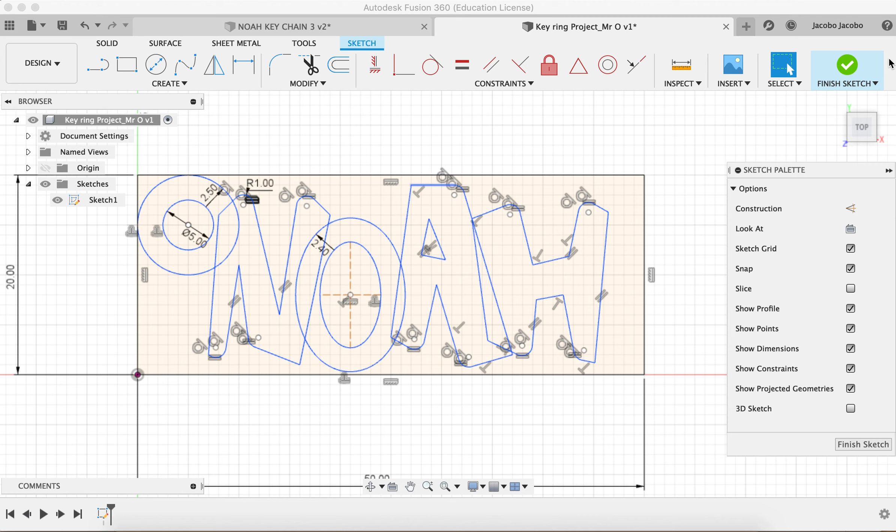Okay, welcome back. So the next part of this video, we're going to talk about extruding. Reminder that the goal of this is to understand the difference between design and the sketching space, and then how to use bodies and pay attention to the sketches inside of the browser, with the ultimate goal of 3D printing and laser cutting. So I've finished my sketch, and this is what it looks like.

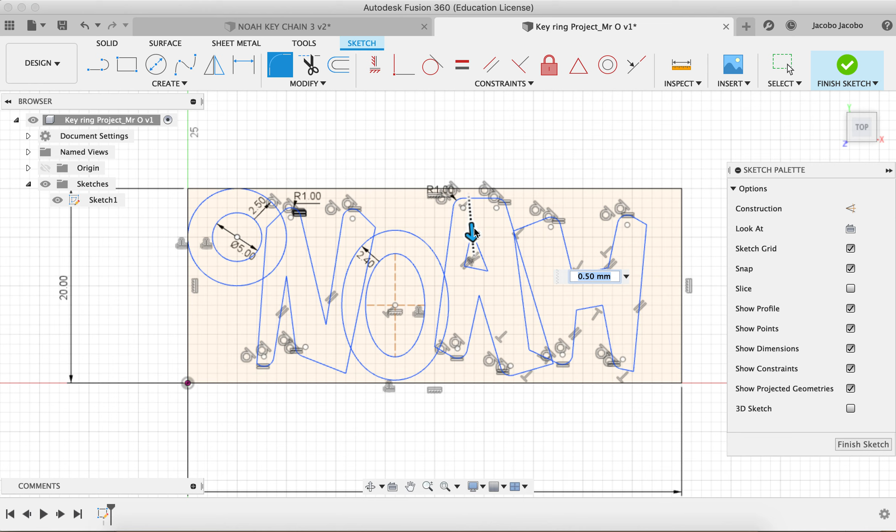I added a couple of things to remember. I can click here, hold down Control, go to Edit, and then something else in this Modify tool I was working on is you can also use this, it's called Fillet. Inside of this fillet, I can click one edge, click another edge, and see how it curves the edge for me. It's just another little tool you can use if you'd like in the sketching mode.

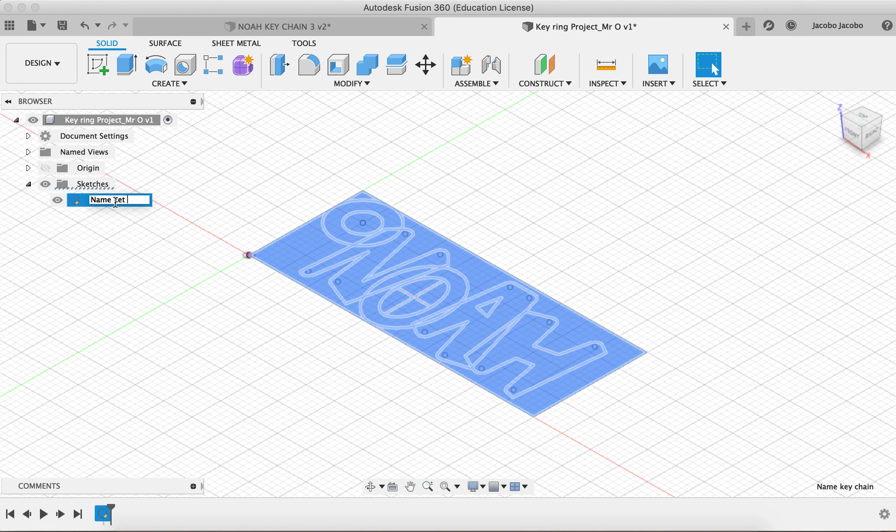So now we'll go back to that isometric view, and now I've got my sketch. You see how that's the sketch there. I'm going to change this and say name keychain. That's just again to keep things organized. If you click again, name keychain. Okay, good. So now I've got this sketch all finished, and now I'm ready to extrude it.

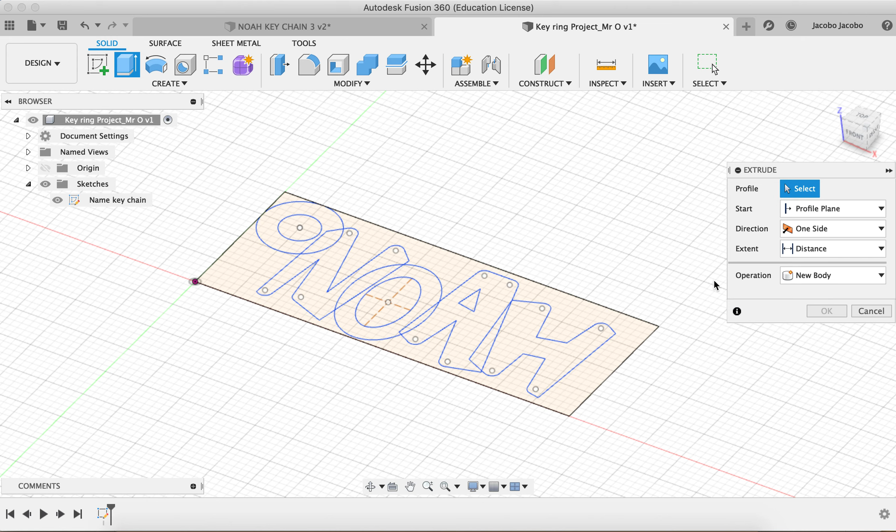So the way that I extrude this is I'm back in this design mode. Yep, I'm not in the sketch mode. So I'm going to use the Create tool, you can see it's Extrude. I can click the button here, or I can even just press E, and it also brings up the extrude window too.

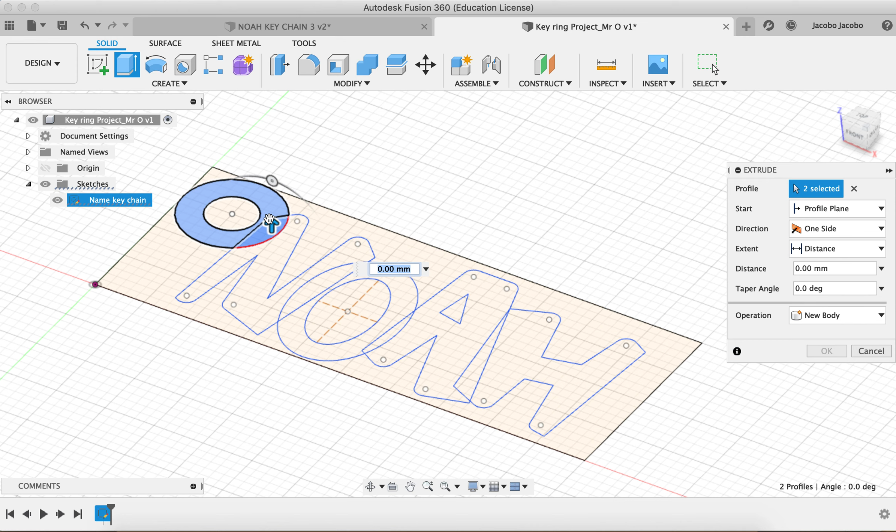So to start off with, I just want to extrude this key ring. So I can push it up, but to select, see how inside here, as I do it, it only gives me this option, but I really want to get both. So the way I can get both is I can click this, hold down, and then I can extrude it up. For this project, you can move it up as much as you'd like using your cursor, or again, you can type it in and say a specific amount, so you know how much it is.

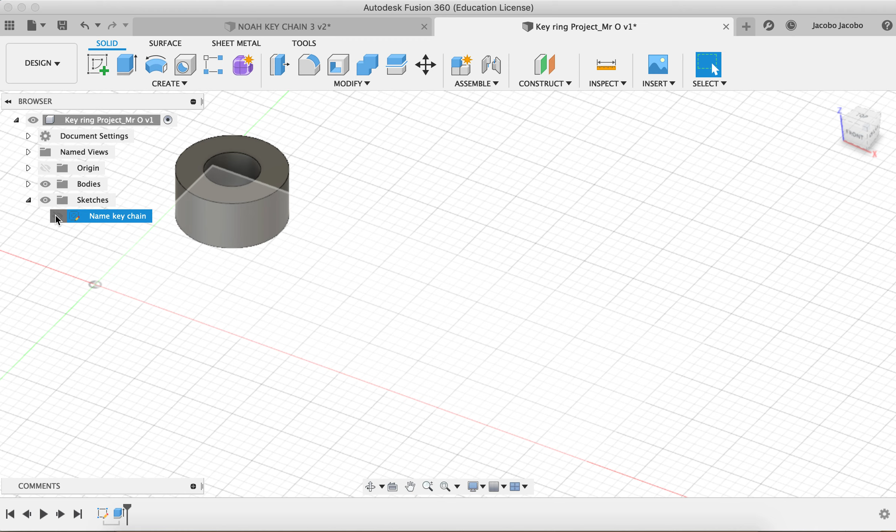Up, my sketch went away. So here's where understanding the browser is important. Over here, if I turn the bodies off, the bodies goes away. But here, the sketches were turned off and the sketch went away. So now I just click it again, this little eye next to it, and it will pop back on. So you can see it back, turn it off, turn it on.

Now, before we go too far, another thing you want to do, see how there was a new body created? I want to click in here and give this a name too, say keychain ring. Because that's where the ring is, and then all the other parts are the letters that I'm going to use. So now I can just move along and keep extruding.

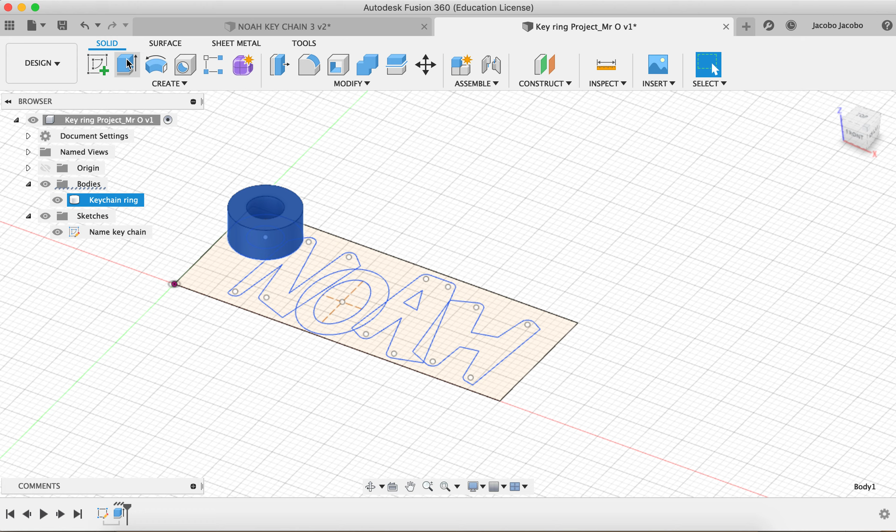Remember, hold down Shift if you want to add more than that one object. So you can either make it bigger or smaller, it's up to you, or however you want to extrude. Remember, I'm just clicking E, so that's going up like that. But this next step, one thing you want to do is pay attention to this window.

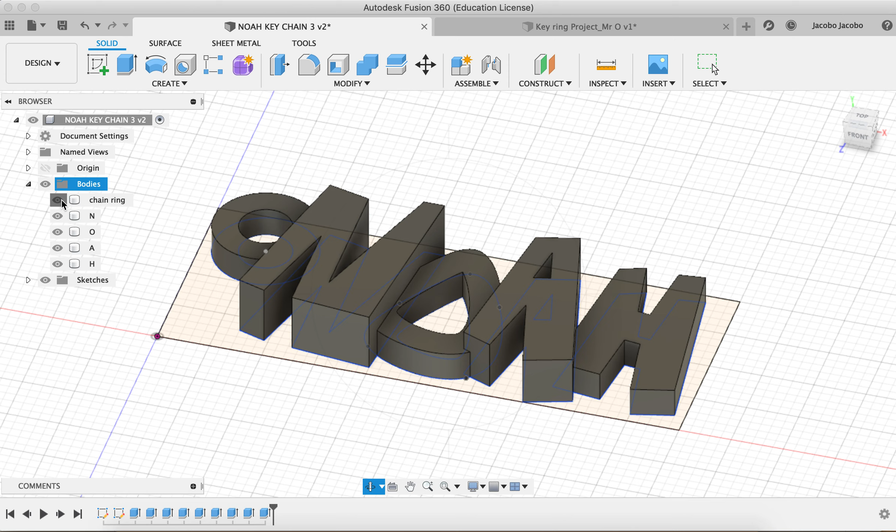This pops up: Join. What happens is if I click join, it's going to just make this one piece, okay? Versus over here, if you see in my bodies, what I've done is I've created a new one, so see how it's a different body. Again, this is really important to just keep your work organized. So I don't want to do the extrude and have it join.

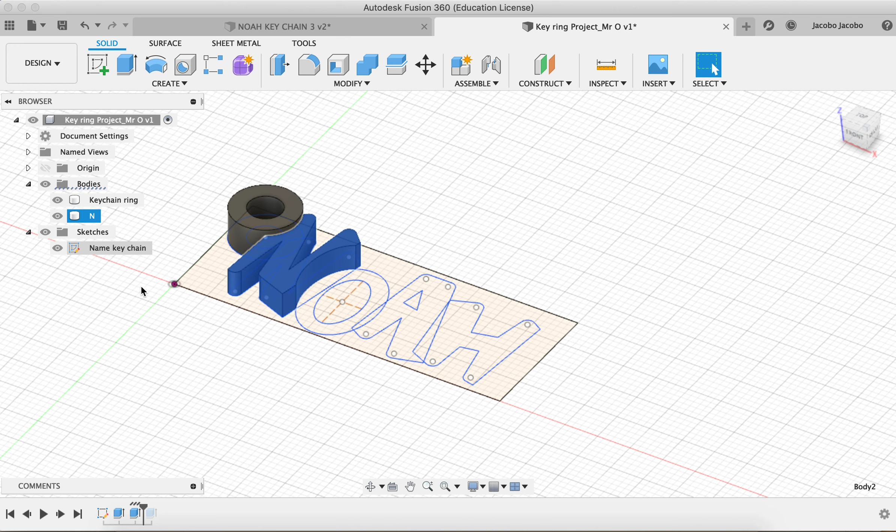What I want to do is extrude, and I want it to create a new body. Click this dropdown, click new body, and the new body pops up here. Over here, change it to N, and really pay attention to that as you're working through all of this different extruding. Extrude it back up, this one I want up, I missed a piece, so I'll click that and move it up a bit.

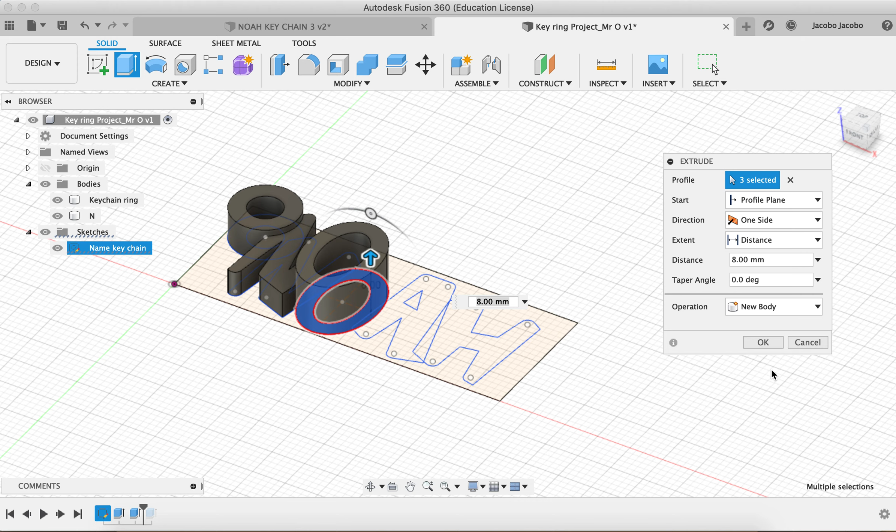I don't want it to join, remember, I want it to be a new body. Change it to O, enter. And then I'm going to do the A, clicking the extrude. Not join again, new body.

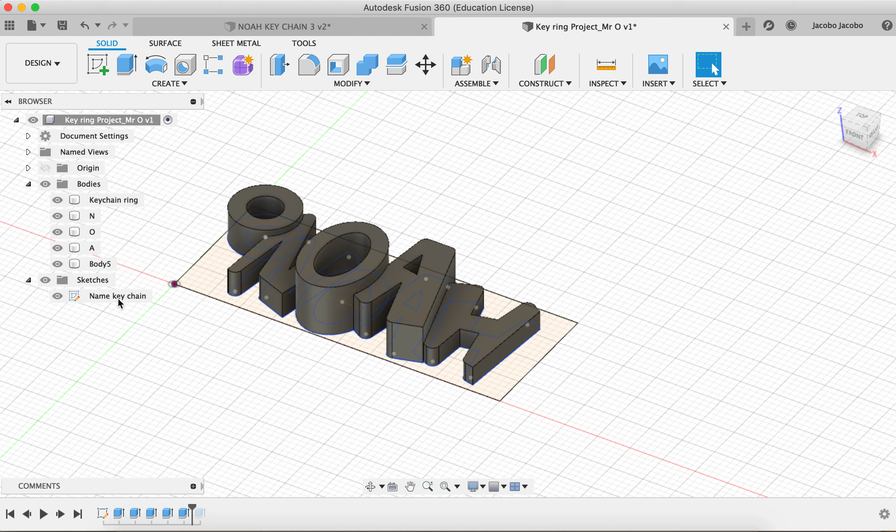A, extrude, push it up a bit. Last one, remember not to join, to create a new body. And there's my H, all right?

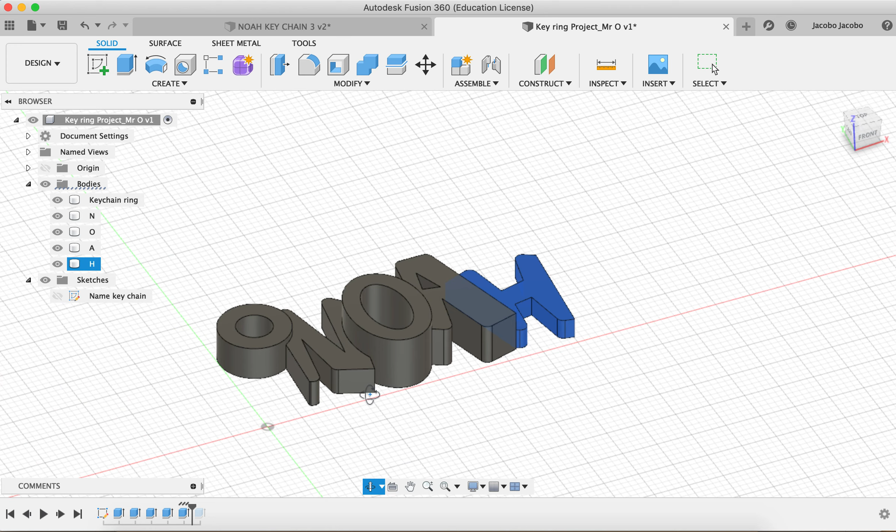So there you have it, that's just extruding your sketch, and now you can see that all I've got is this model, the design. Scroll and move around, you can see what it looks like, making sure that it's all been extruded correctly.

Another thing you could do, depending on your design, is extrude up this little outside if you want. So see how I can move that up just a little bit, maybe a millimeter or two, no joining, but creating a new body.

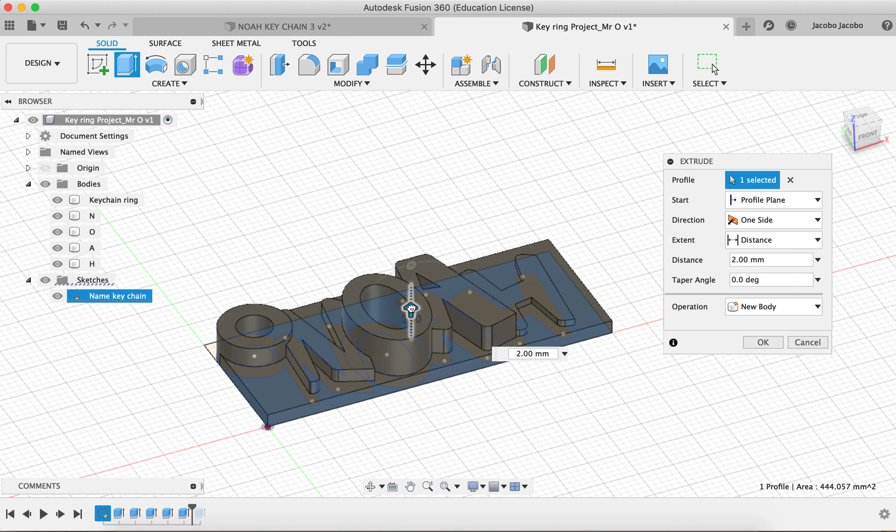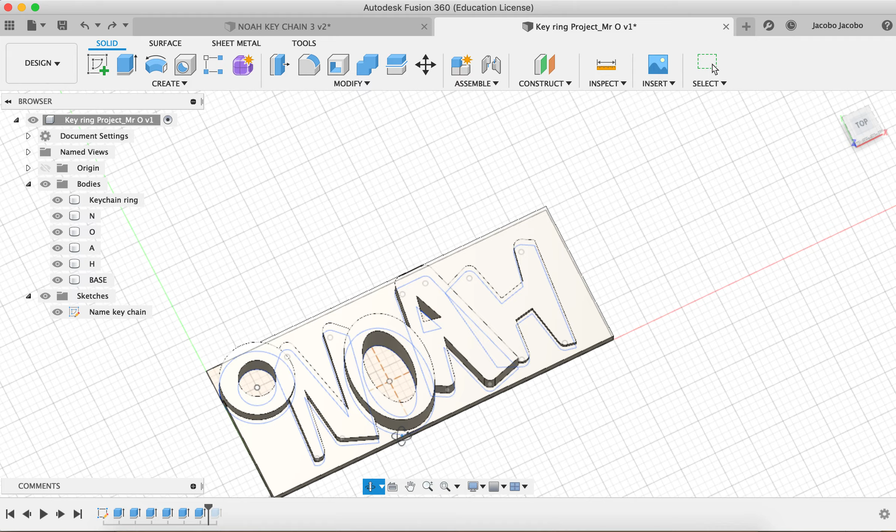Up a bit, I want to create a new body, remember. And this one, call it the base if you'd like. If not, you don't have to, but just so you see, here's another part of your design. Whoa, whoops. Okay, so see how that came out?

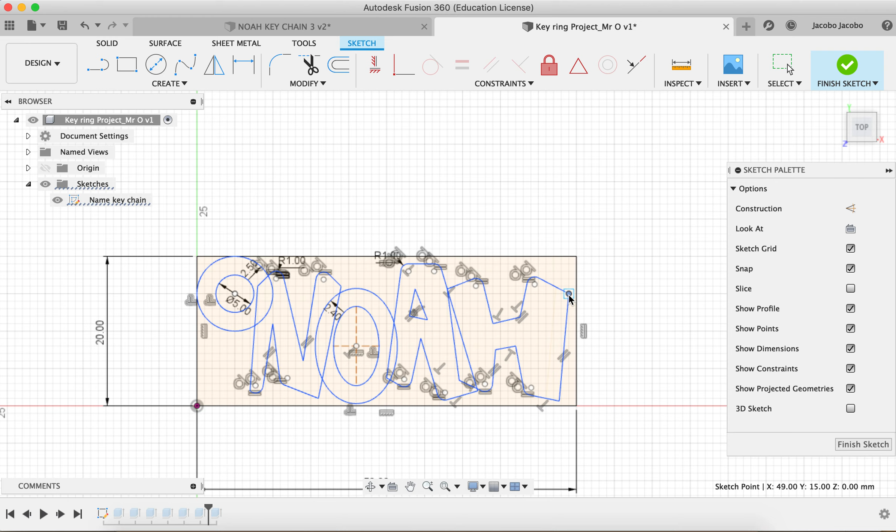So another thing, just to remind you, if I turn all these bodies off and go back into my sketch, say I want to move this or make this a little bit bigger, modify my line, or pull something out. Let's try to move this one down a bit just so you get to see how it could look, or maybe make this spot a little bit smaller. So as I modify this sketch, finish sketch, and turn my bodies back on, the bodies change with the sketch.

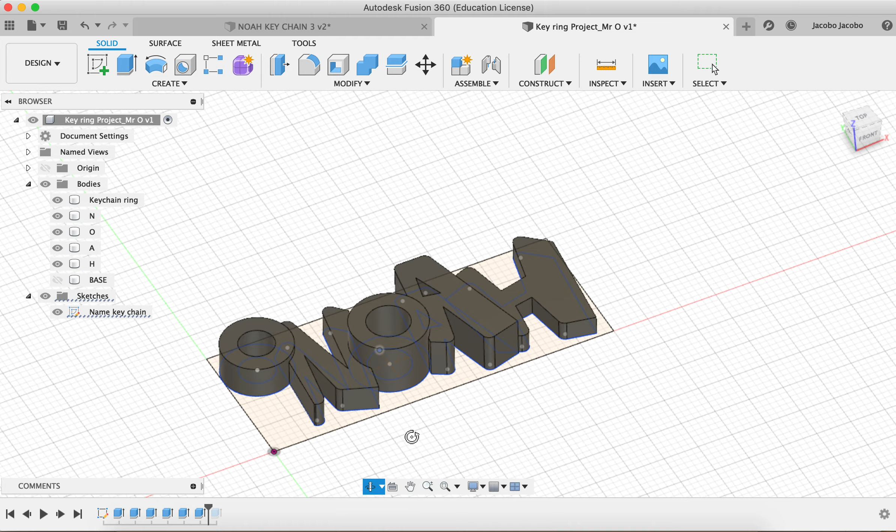So it's a nice little feature, and it's a really nice thing for you to pay attention to as you're working. This is something really simple, but it's really important to keep organized.

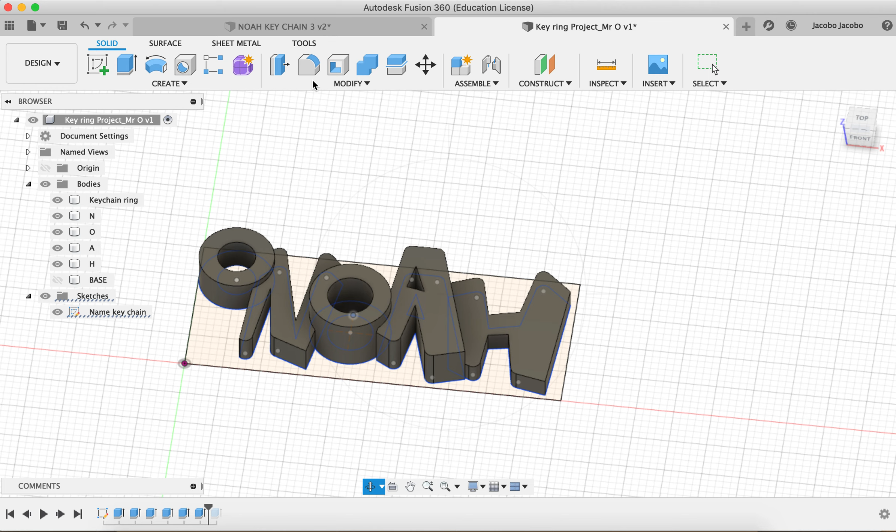Last thing I want to add, a little final touch inside modifying. I'm doing this one for my son, and I want to make sure I've got some nice smooth edges. So what I can use is inside modify, I'm in the design mode, not the sketch mode. Inside modify, I can use this tool, fillet or chamfer. So what this does is it gives me a nice little smooth edge around my pieces.

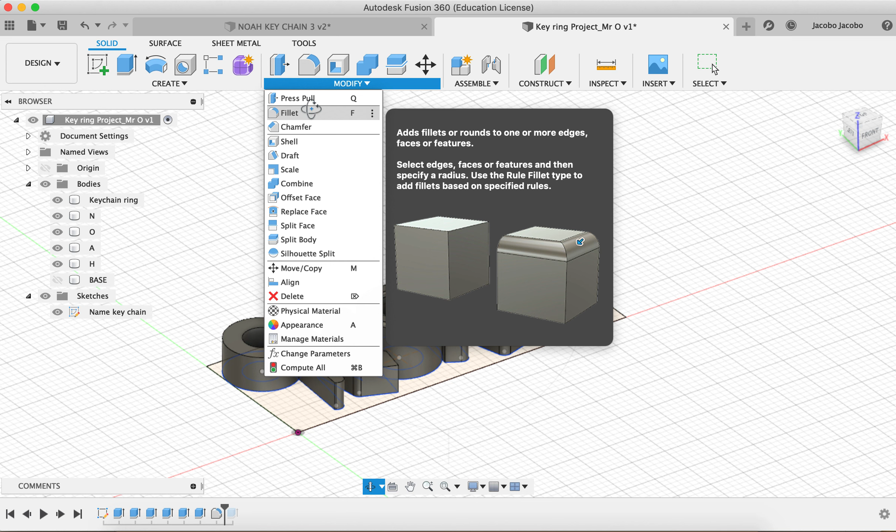Okay, say okay, so see how that's given a little smooth edge to that O? Then I can keep going, and I can either click it, find it in here, it's up to you, or you can try the chamfer one as well too. Hold down shift because I want to do a few different lines, same thing, just push it in a little bit. So you see, you could keep going and make some of those lines smoother if you would like nice smooth edges.

Okay, so for now, that's the final goal. Just make sure that you pay attention to in your browser, make sure you're labeling, and this is where you should be at right about now.